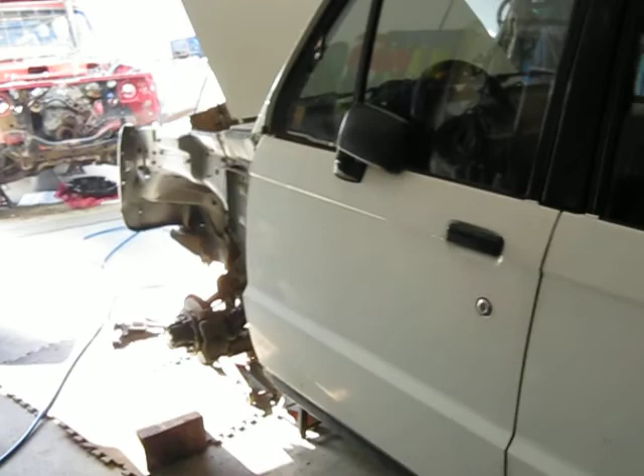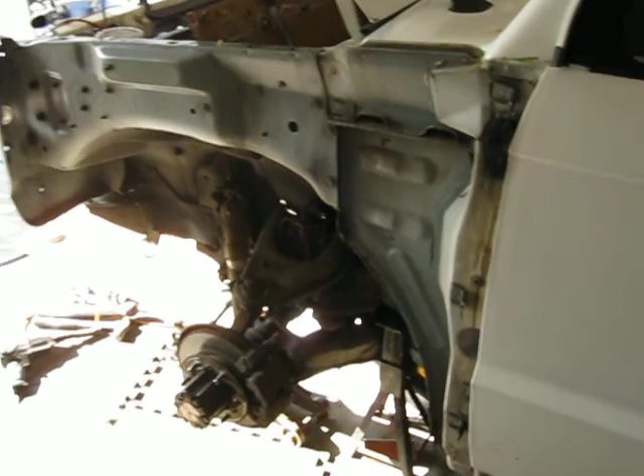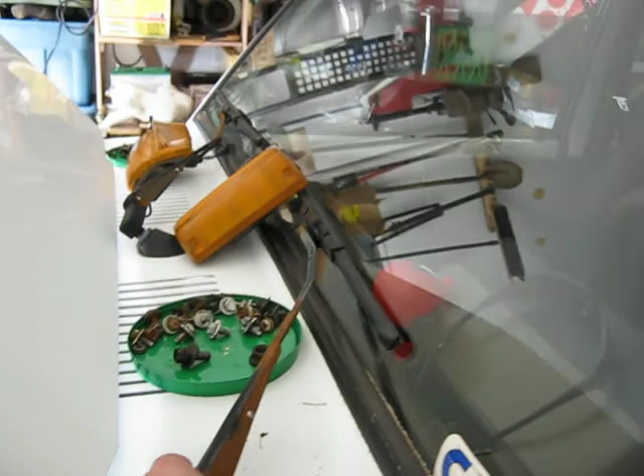I've got a lot of work to do on Goldie before I can do a proper introduction, but in the meantime we're just going to do a quick video because I'm getting a number of requests on these windshield wiper motor assemblies and the armature. So I'm going to share with you everything I've got today, and share with you how I would strip them off.

In this situation, the first thing I'm going to do is get in here with some penetrating lubricant and put it on this collar. I don't want to use a heavy petroleum, maybe a lithium grease, or just a little PB Blaster, but I'm not going to throw a 3-in-1 or any kind of mineral oil on there.

Again, here on these threads where this nut is, it's just as simple as lifting up this collar and you're exposing that. If you want to actually take the arm off, it depends on what you're doing. But we're going to go through the whole thing today. If you want to take the arm off and repaint it, give it new wipers, whatever it needs.

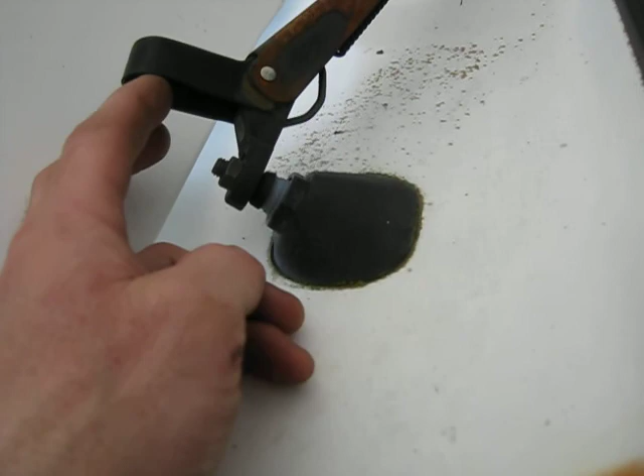Sometimes these pins are a friction fit, and there are actual grooves here on the main pin, so you definitely want to throw a little penetrating lube on, break that nut off, and in some cases I'll hammer on the end of the pin.

Skip the whole winding-the-nut-out-to-the-end-of-the-bolt thing. I'm not actually hitting it that hard, I'm just trying to get enough breaking force in there to separate the two, because sometimes they will stick on there when they're really good.

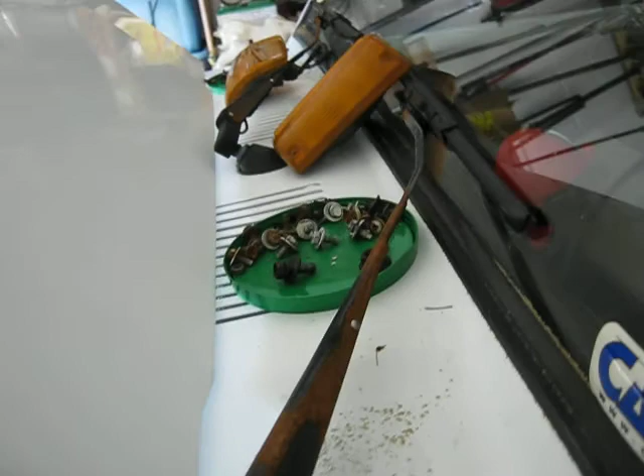There's a couple different pieces in here that can wear out, and as you'll notice, the main retaining nut is like a cast pot metal, really cheap, but doing well for being 27 years old. So I've got a full unit that's already dismounted, and we'll just take a look at the beast and see how it's holding up, because it's the one that gave us our donor to take a look at today.

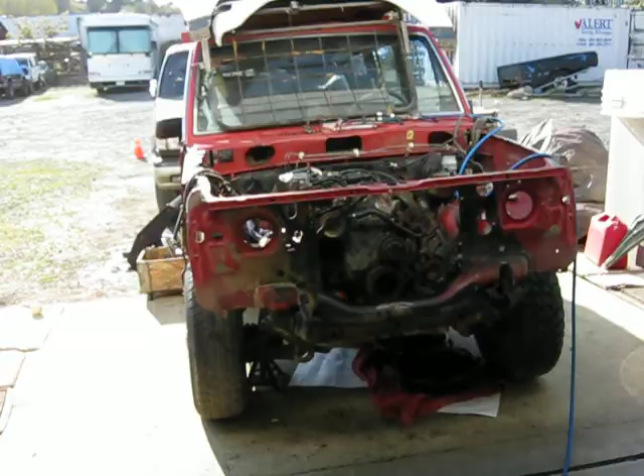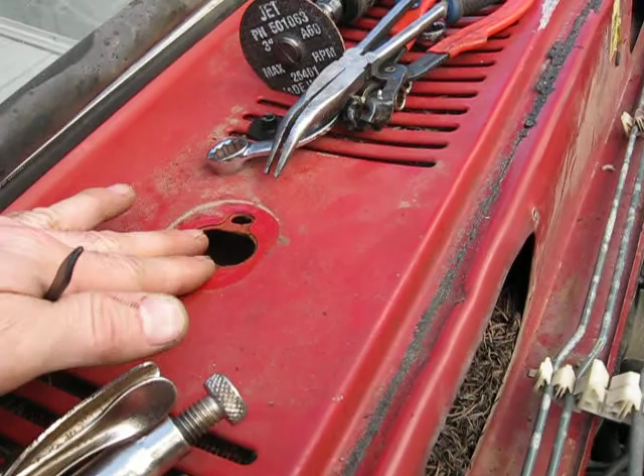So the beast is outside and definitely not happy, but giving up some really good parts here. What it looks like, as you can see, once you get them removed, then you end up with a giant hole on the top, right? And that is a source of rust and corrosion.

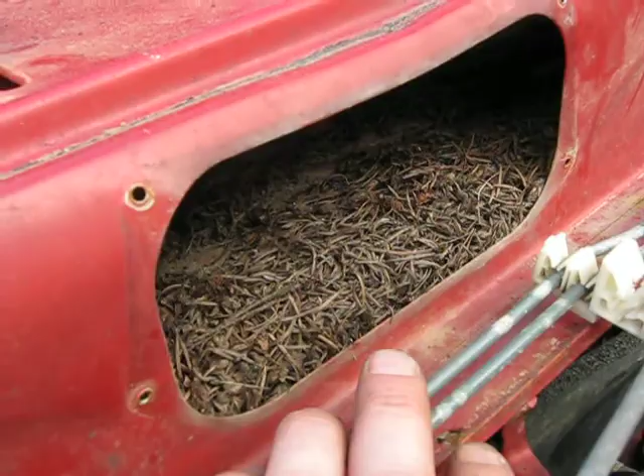I don't know if you can see that, but in a full restoration, I'm definitely going to pull these off and pay attention to this. Once you get those arms removed and you get the covers and the gaskets - there's a little gasket underneath - then you can pull the pins back down inside, and inside the cavity here you can see this one was parked underneath a pine tree. Wow, that's also, of course, a source of water retention and corrosion.

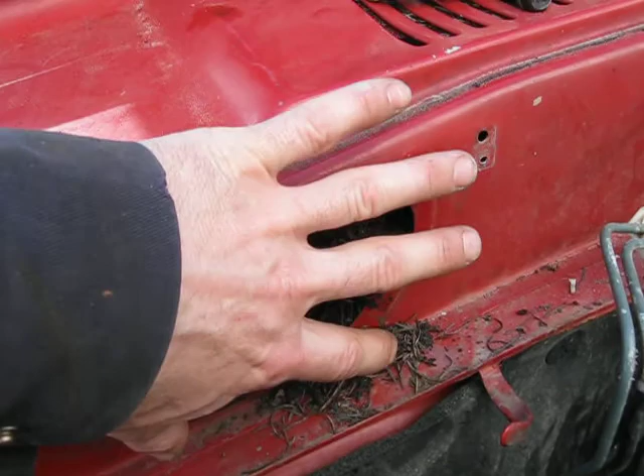But anyways, once you get the motor removed, as I was telling Sean on our phone call, you can actually just pull the whole armature out through this hole on the passenger side, through the motor hole. There's maybe going to be a little bit of gasket material left around the edge, I wouldn't worry about that too much. The original gasket's still going to hold together in most cases.

So once you pull that out, then we can take a look at how it's put together. Now, I did some research on the manuals too, so we'll have a quick look. We get down to this 1988 KB84 manual, and honestly, I was hoping to find something, but really they come at it from the factory manual point of view of an installer who's experienced and isn't really going to need a lot of instruction on stuff like this motor assembly, because it is pretty simple.

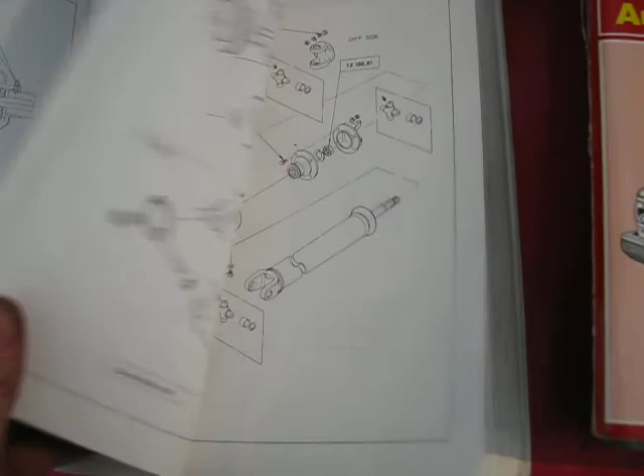But I was surprised not to find anything. I went to the accessory section expecting to find something, but nothing, just a lot of stuff on the propeller shafts. One of the more interesting things I did find was the section for headlamp washers for a 1988 KB84 - yeah, you heard me, headlamp washers. So there's some interesting stuff in that accessory section, but nothing on windshield wipers.

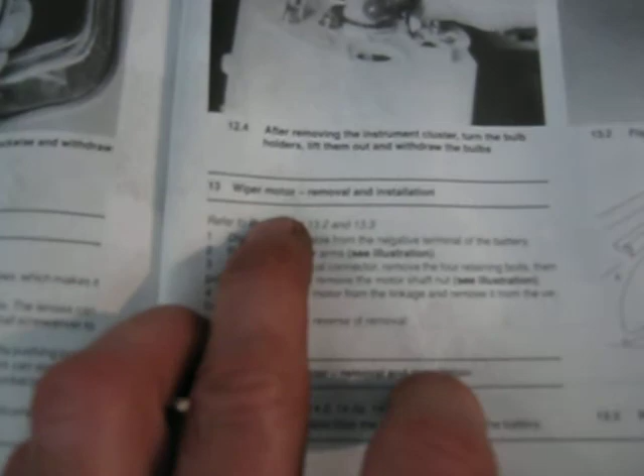When we get to the Haynes manual, yeah, definitely found some stuff in here, and I'll show you exactly where that is - page 277 of your Haynes manual. I don't know if you can make that out very well, it's chassis electrical systems, sorry for the cheap camera, guys. Down in section 13 we get down to wiper motors, and that's the removal and installation.

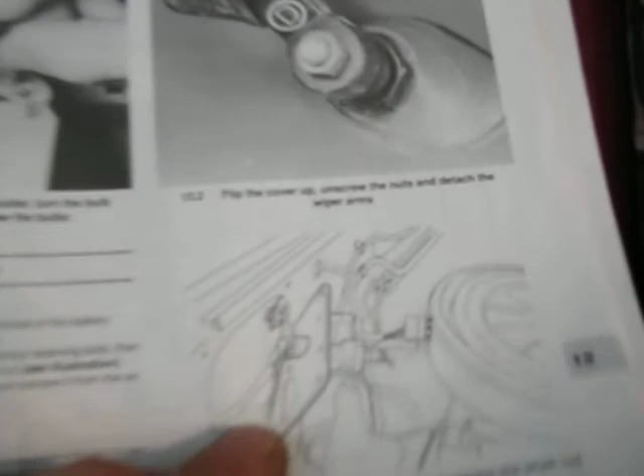And so, yeah, again they talk about the top nut here - just lifting the cover, pulling the nut out, and you get the electrical connectors off. There is a ground wire that attaches to the bolt on the lower driver's side there.

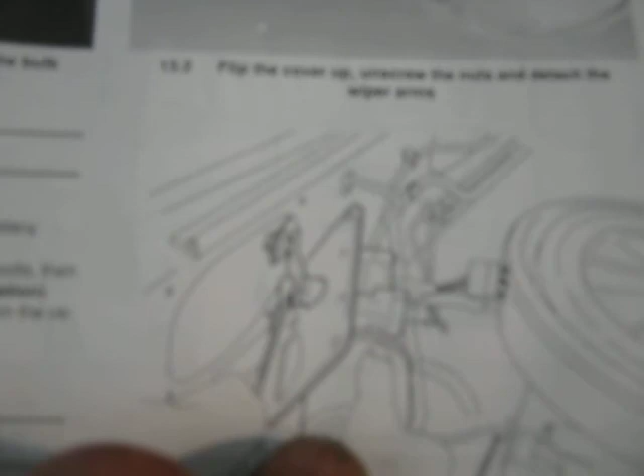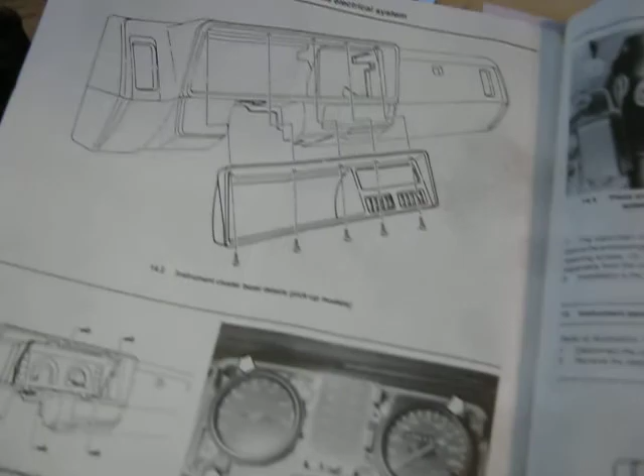Again, it's a little bit of work to split the motor housing, because those gaskets are pretty much glued in place. The Haynes manual has some good info on that, but not very much, because the next page goes right into the dash.

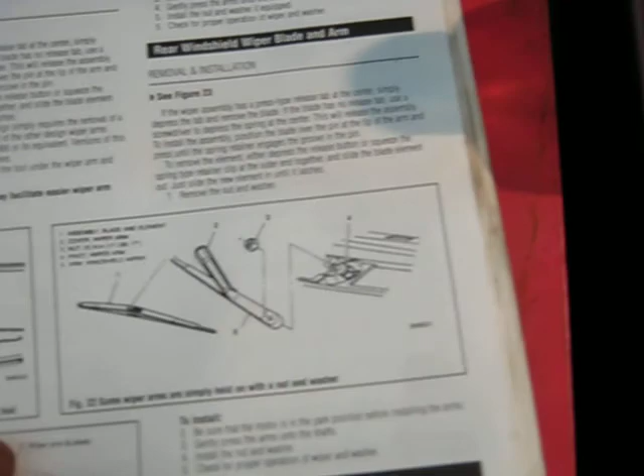Then I get down to the Chilton's manual, and this is where I find some of the best info. Honestly, if I'm having a hard time finding stuff in other manuals, I love the Chilton's for that - they're very detailed. So we go to chassis electrical, section 6-9, and right here we have windshield blade and arms, and then the rear windshield motor.

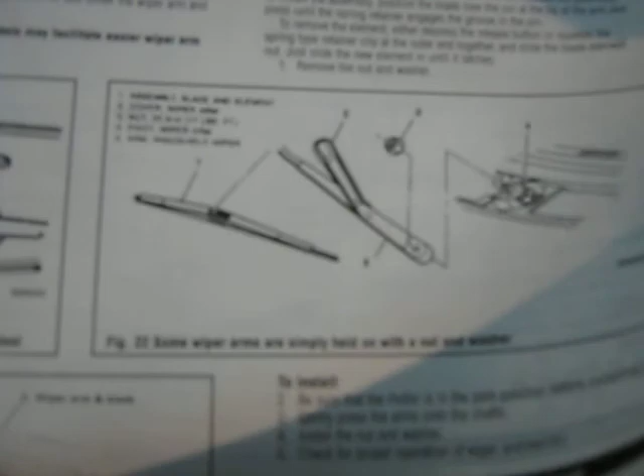It's a pretty thorough section, and again they just refer down to that pin - pulling the collar back, getting that nut off, and then, like I say, I tap the pin on the head if I want to get that arm to come off. A lot of times they stick, so just don't tap it too hard.

And then they get down inside and they show you the motor itself on page 6-10, and the ball and socket system. So we're going to take a look right now - we've got the whole assembly here on the bench, okay?

Actually, I'll just flip it around here so we're on the right side. Oh, it's not standing very well.

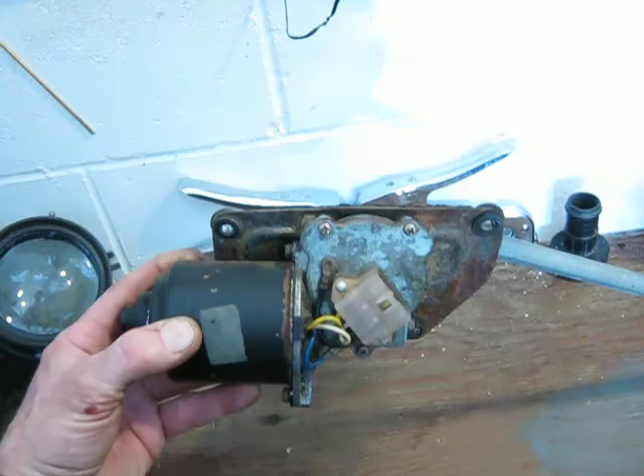So from under the hood, here's the view that we normally see, right? There's the motor, and it's just sitting on the back of the firewall right there. And inside, down right here, you can see there's these nylon cup sockets, and they have a little hole there that retains the pin, and the ball snaps right in.

Now that one is looking pretty nasty, right? So when I go to lubricate these, I'm going to use a white lithium grease. I'm not going to use anything that's going to eat the plastic - that's what I'm hoping to stay away from.

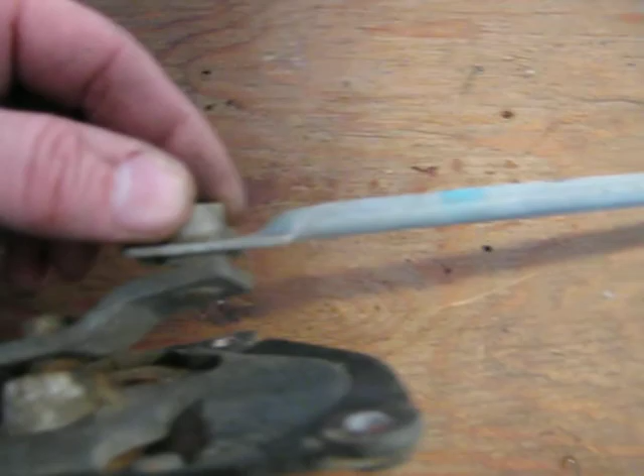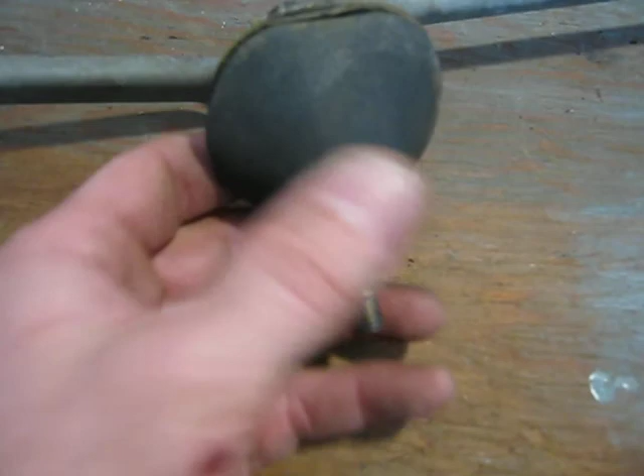There are two different sizes - can't really see too well, but the one that's on the motor here is larger than the two small outer arms. So this here, we're looking at the passenger windshield wiper. There's our retaining nut - we pull that nut off, and then of course the arm would be under there with the wiper attached.

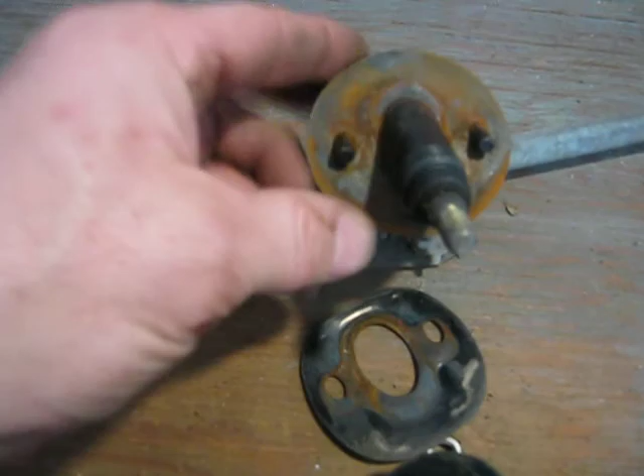We get the main nut off, and then the collar just slides up. You might have to pry it a little bit, and then underneath there you've got your gasket, and now you've got the main lower assembly with these alignment pins. It just rocks back and forth on these arms and this ball and socket setup.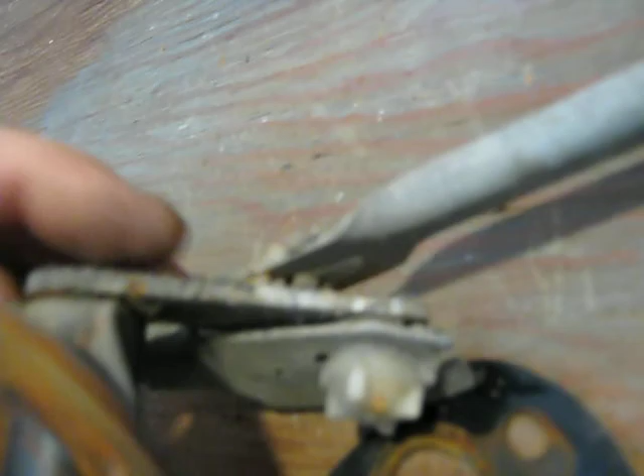So you can see here there's two sockets, two balls, and of course that's the way we want to be, right fellas - like to keep them both. And if this falls out - this is of course the driver's side - so if anything happens to this cup, or it gets brittle and cracks...

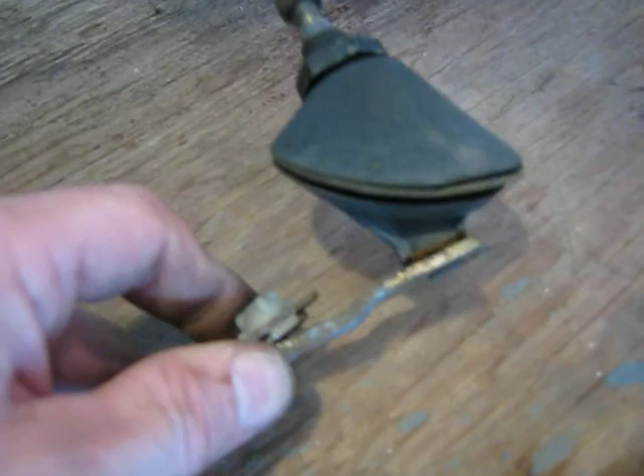This set we're looking at is from an '89, so we're talking about a truck that would be 30 years old next year, and I'm willing to bet this is original equipment. It's not uncommon for me to see big piles of pine needles and stuff under there, and the original lube that was in here is definitely gone in most cases.

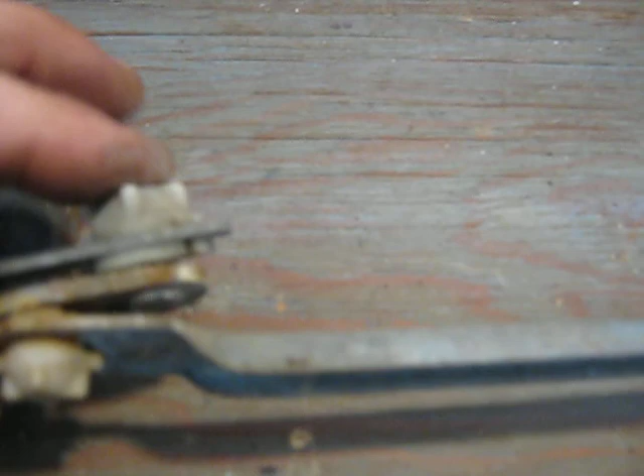So to pop those apart, I'm just going to gently pop them out, pulling the ball out of the socket, and then you can actually replace these.

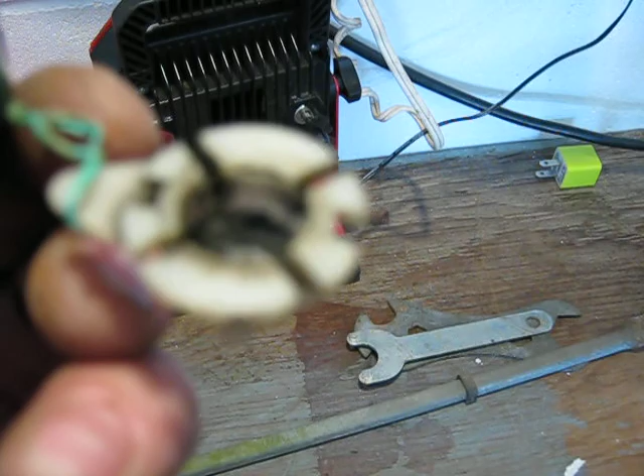Now I have no source, so I can't access these brand new, but I do also have sets of some used equipment. Generally what I'm looking for is to see that this cup is in good shape, and the retention pin - I don't know if you can see it, I just got a clothesline, a little twist tie there.

Anyways, there's a little tiny bead on the end, and that retains it inside so it doesn't twist and turn. If it breaks, that's what eventually, if it starts twisting and turning, then the ball's going to come out of the socket.

And then you got no windshield wiper that's working, and it's just like flopping around like one-armed Jimmy. So it can cause damage inside there, or it can just get worse, and then all of a sudden you have no windshield wipers altogether.

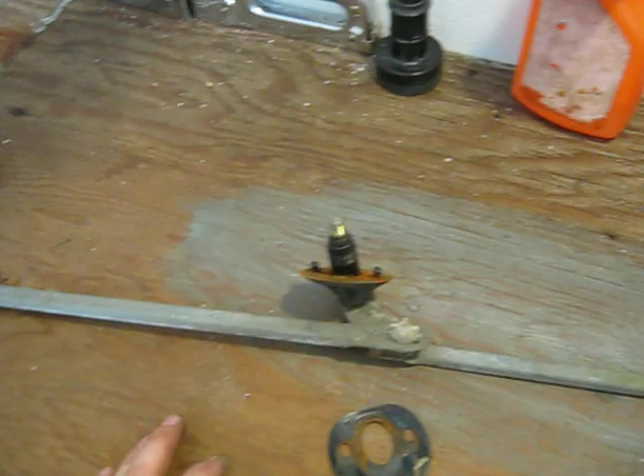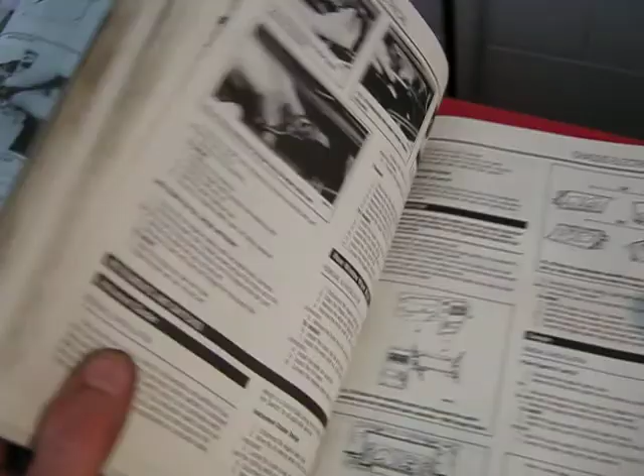So anyways, I hope that helps, fellas. If you need any more information from these manuals, I can definitely share with you. Of course, copyright infringement, I've got to be careful with that, so I just want to share with you what I've found in commonly available manuals.

The shop manual - no help at all. This one here, I can pick it up at Canadian Tire anywhere in Canada. Any Lordco auto parts place will order it in if they don't have it in stock.